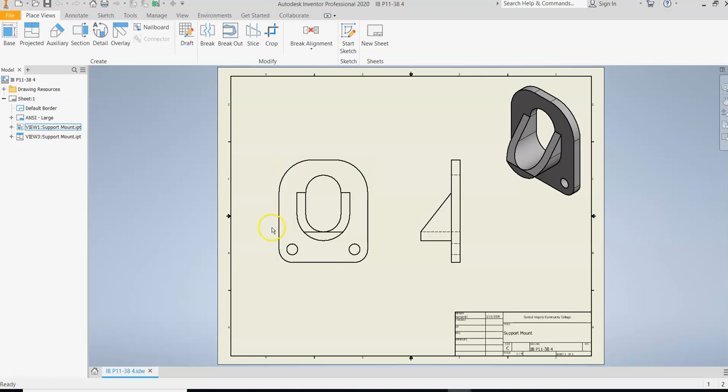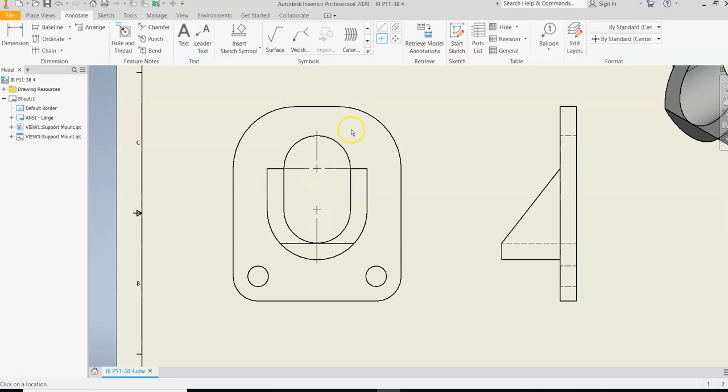From here we're going to go ahead and, just like in the other drawings, first start by laying out center lines. I'm going to place my center lines for that slot. I might as well go ahead and pick the larger diameter right here, and then fill in the rest, so we've got a center line here and a center line here.

Typically when you're working with a part that is symmetrical, there is one center line that extends down through the middle. That's one way of telling that you do have a symmetrical part. So that's what the center line is given, signifying right there in the middle.

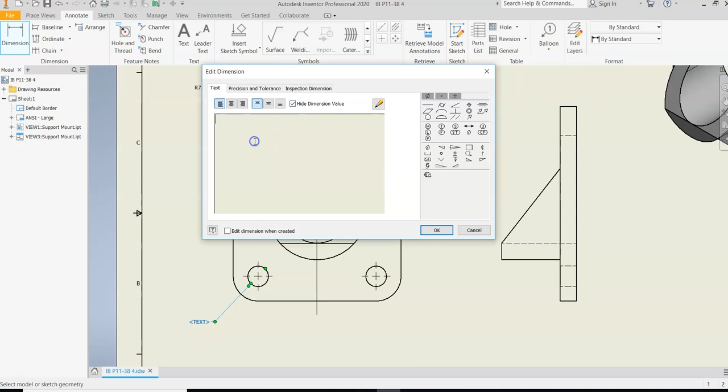Now I'm going to start placing the rest of the dimensions. We're going to use the radius dimension to locate the radius for each one of those arcs. Then you can go ahead and put your diameter down here. Remember that when we do this, we are using the ANSI method of giving the quantity, so it's 2 times, and then unhide your dimension value, and that will give the correct dimension.

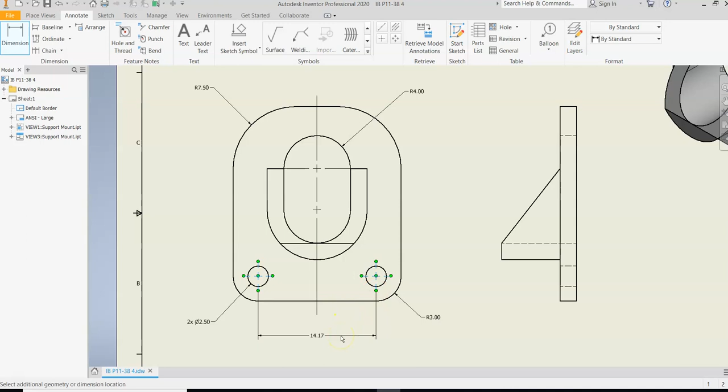I also need to put the radius for this arc. You could put it over here since you have enough room. Remember, we're trying to keep our leaders between 30 and 60 degrees. We do not want to have anything less than that. So the recommended angle is between 30 and 60. Most people can eyeball a 45 degree angle without any problem.

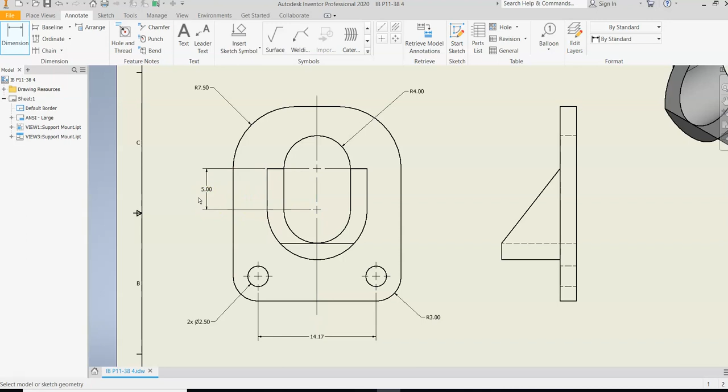Looks like I need to go back and fix that dimension on that part. Something's not right. Let me put on some more of these dimensions, and I will go back. So, as you see, I sometimes do make mistakes, but the best way to find these mistakes is when you're placing the dimensions. It's definitely like a self-check, so you should not have any dimensions that are listed wrong. If something is wrong, you have to go back and make those changes.

It looks like I probably clicked on something or did not space those out. I know I used the same center, so maybe I need to check that dimension, and I see where it is—it's this right here. So there's not a flat in there. I need to go back and fix my sketch. I might as well go ahead and do that now.

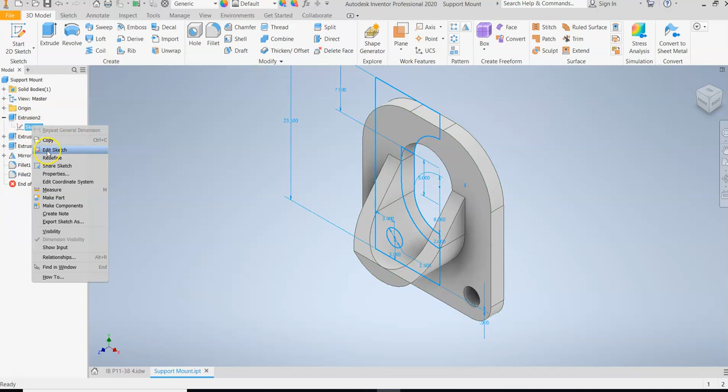So I'm going to go ahead and open up that drawing, which is the support mount. I hope I didn't mess you up too bad on that when I gave you that. I sure did—I just chopped it right out of that rectangle. It's all good, we can fix this.

So this dimension right here should be the radius, which is 0.75. Or, I'm sorry, no, 7.5. And this dimension down here at the bottom, will that be that same dimension? 7.5.

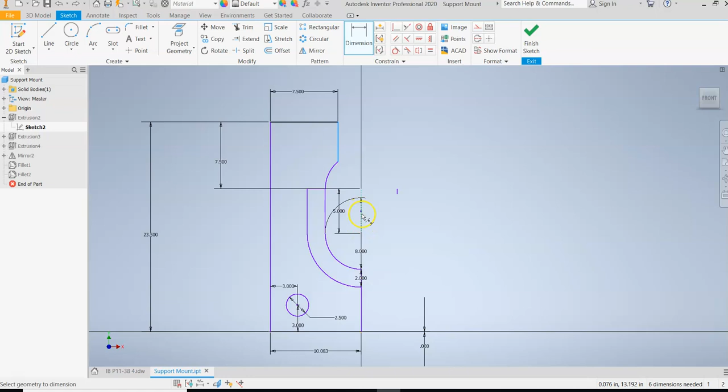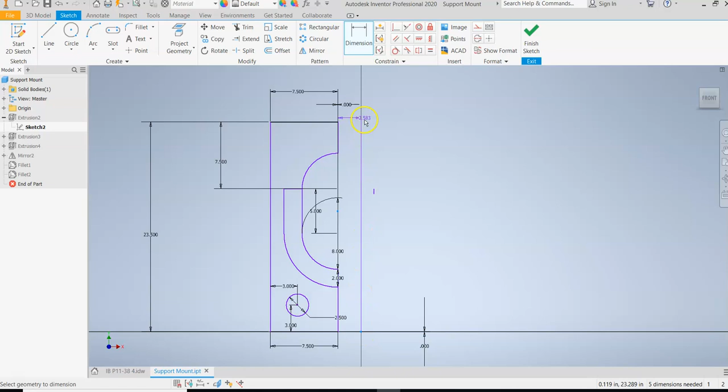And that messes up some things, so I'm going to undo that. Put that as 0. That takes that over, and then let's see here. I'm going to link this back to the origin. I don't know what that little line is right there, so I'm just going to delete that.

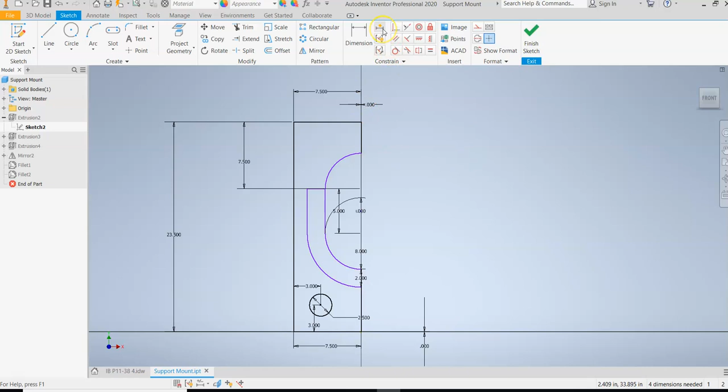We'll just go ahead and put the auto dimension on there and apply that. Okay, so it's fully constrained at this point. There we go, so that's fixed, and there we go.

That changes that. I do have a little dimension here that needs to be fixed, so I'll go back and fix that radius now. Alright, so looking at my dimensions here, I've got the 9, so that now has updated. Oops, just moving that value. There we go—so I've got the 9, the 3, the 2.

So just kind of go through, self-check, and now I need to put the dimensions over on the right side view. The preferred place to put that dimension is down below the part, not up inside of it like the book shows.

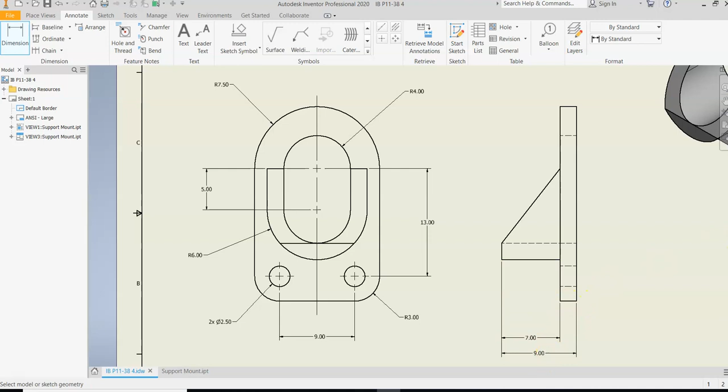You could give 2 dimensions here—if I were to give this dimension, I would not give the overall dimension. The other dimension would be to give the overall dimension where we're not completing the chain. So that would be the better way of dimensioning that part.

So that's it for this drawing. Sorry about the little mess up there. Hopefully that didn't throw you off too bad when you were doing that. Maybe you had a better eye than I did as I was laying that out.

So you should be able to see that the whole beauty of Inventor is to be able to go through and make those changes pretty easily, and that's why we use 3D modeling for that exact reason. Let me know if you have any questions.